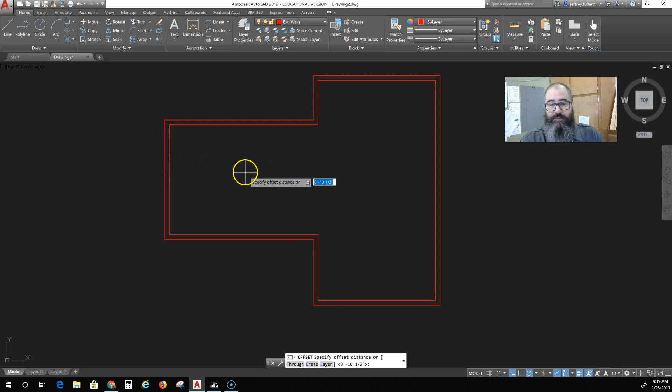So to start with, again, I'm going to use my offset to make use of some geometry that already exists. Now I want my bedroom, my master bedroom. Let's say I forget, sometimes I forget my measurements and I should write them down. But I forget how far it was from here to here, and that's 20 feet.

Okay, so that's going to be enough room because there's also going to be a master bath over here as well. All right, so I want my bedroom to be about 14 feet wide, maybe. I haven't decided yet. Again, we're testing.

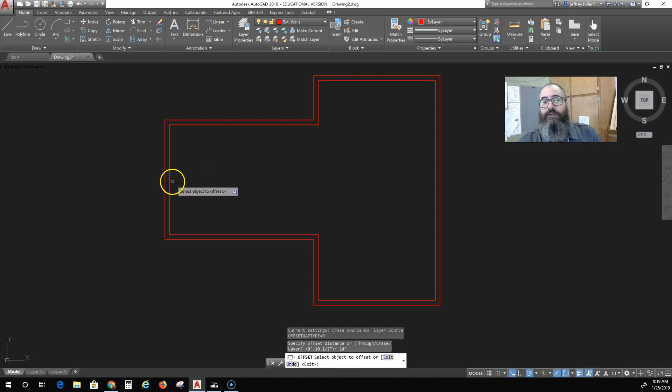So I'm going to offset this interior wall line over here 14 feet. And then I'm going to offset it again. And of course, because I'm just using the same offset command, I'm going to just temporarily change that to the thickness of an interior wall, which the thickness of these interior walls are going to be about, let's see, what was it? 4 7/8 inches, and that's with my core materials and of course the drywall on each side. So I'm going to say 4-7/8 inches, and there we go.

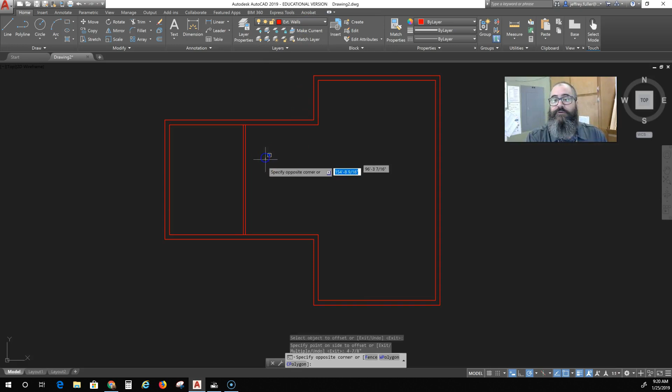Now, because these are interior walls, I really want them to be on the interior layer. So basically I'm going to select them, and I'm going to come up here to my layers panel and click on interior walls. And there you see they're now green.

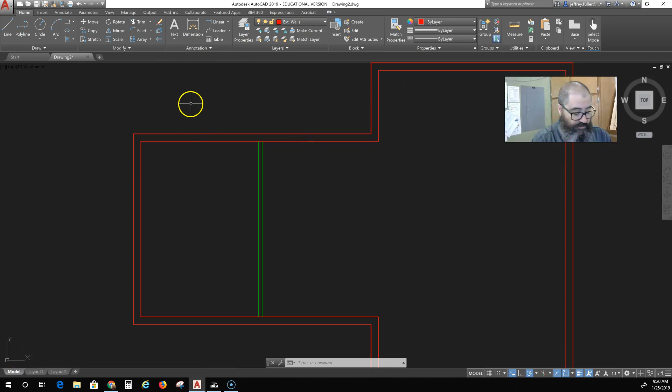Okay, and from here I can choose to do more offsetting, and I think I'll probably do that. So let's do a little trim. I'm going to trim out these little areas right here, and that's going to give me some lines I can work with inside of the bedroom.

And you gotta kind of play with AutoCAD here to kind of get used to what you have to do as far as clicking your buttons. Sometimes you'll see me having some trouble, and that's because I forgot that I have to click enter or something of that nature. I'll try to be a little bit more narrative so that you know what I'm doing.

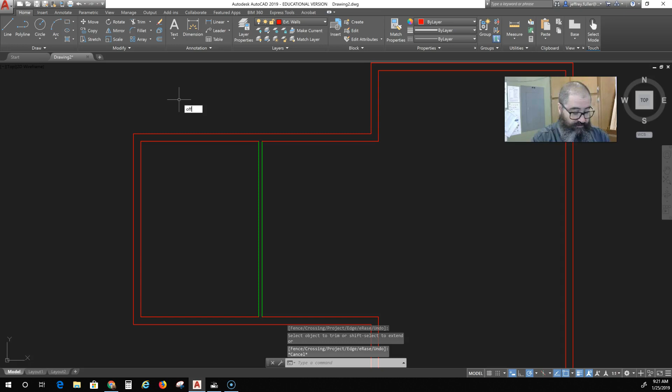But I've got those trimmed, and now I'm going to offset, and I can actually type in offset. And this is for my bathroom. And my bathroom, I'm going to make it about, let's see, 6 feet, and that might change. So 6 feet from this wall to here.

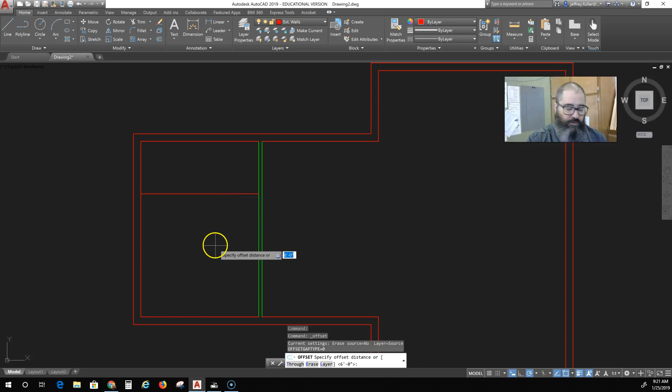All right. And then, of course, I need to do another offset of that one as well. And I'm going to click offset, and it's set at 6 feet. Of course, that's what I just had in there. And I do forget what I'm doing as I'm going along.

Okay, now I'm going to put it on, I'm going to park it on the interior walls layer. Okay, so now we have pretty good area for a bathroom. And again, that might change.

I'm a big fan of walk-in or walk-through closets. I've done these different ways at different times, and I'm going to double check, see how much space I'm still working with.

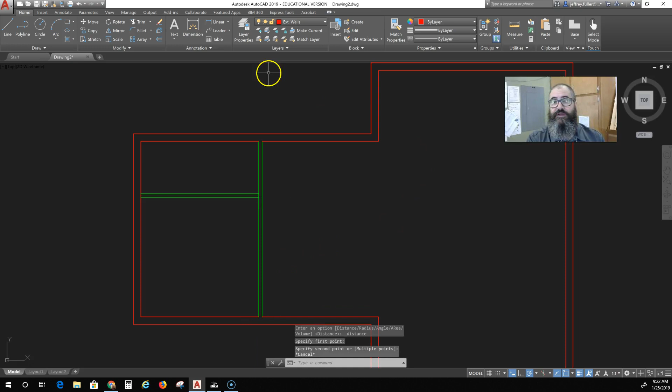13 feet. Okay, so I'm probably going to make a little bit more of some extension here. So what I'm going to do is I'm going to grab this line. I want to move it a couple of feet. I'm not even measuring that, so I really don't know how far that is. All right, and I'm going to delete this one and this one, and I'm going to offset.

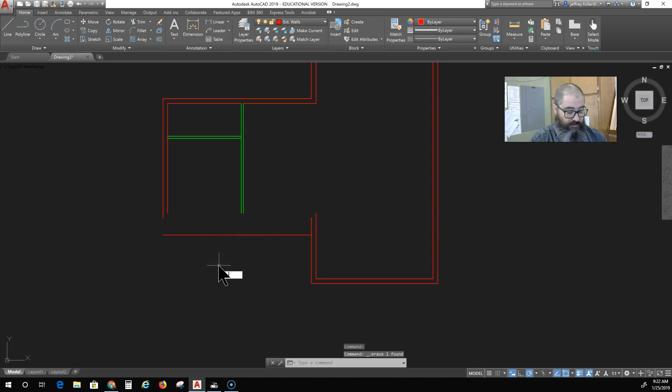Let's see, it was 10.5 inches. It really helps if you write down your dimensions as you're going, because if you're like me, you'll forget what you're doing.

Then we're going to extend. Once I type in extend, I have to choose it and click enter. Instead of selecting my target geometry, I'll click enter again to turn everything into target geometry. It'll go in the direction you want and extend these lines on down.

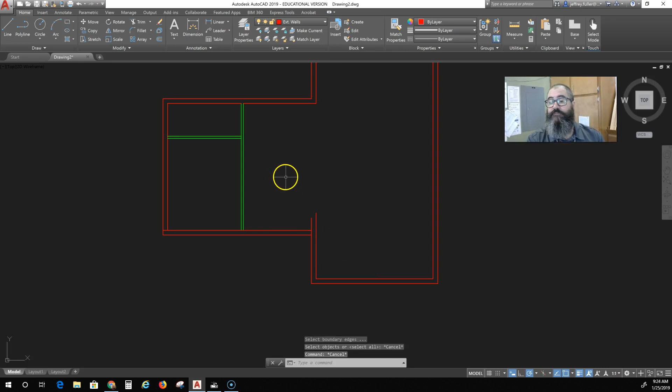Then we can go into trim and do the same thing, clicking enter twice to turn everything into a trim point. Something I did not do correctly there. Trim, enter, enter. Okay, so I'm going to cut that off, cut this off.

Now I can actually use a button, I think it's shift, to switch between modes. I might have to check whether this is trim or extend. Right now I've got it in trim mode, and the shift button changes that. Actually it says it right there in the dynamic input bar: select object to trim, or shift-select to extend. So I can do both while in the same command—I just hit shift to change it. Then I can go back to trim.

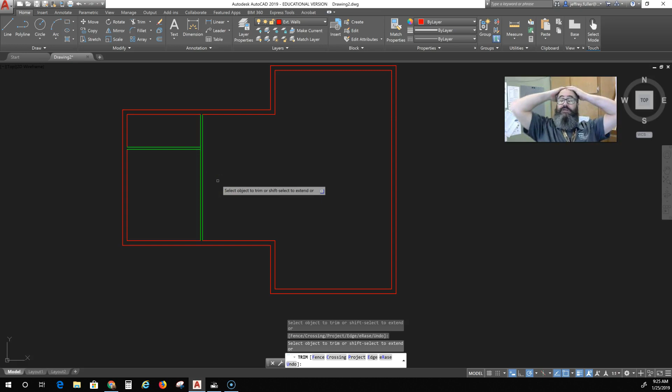I kind of do this as I go, and it helps me think. I may not know exactly what I want to do next, so I do some cleaning up while I think. That's really all I was doing there.

I said I like those walk-through closets—those are my favorite—so I'm going to do this right here. I'm going to extend this. What's a good size, about 5 feet wide? 2 feet on each side to hold the clothes, and that gives you 1 foot to walk through. Maybe I ought to go 6 feet, giving you 2 feet to walk—a little more comfortable while you decide what to wear. So we'll do 6 feet.

So we're going to do offset again, 6 feet. Some of you might be a little more organized than I am—that's perfectly fine, I'm not the most organized person, I tend to think sporadically. Of course I want to offset this one 4 and 7/8 inch.

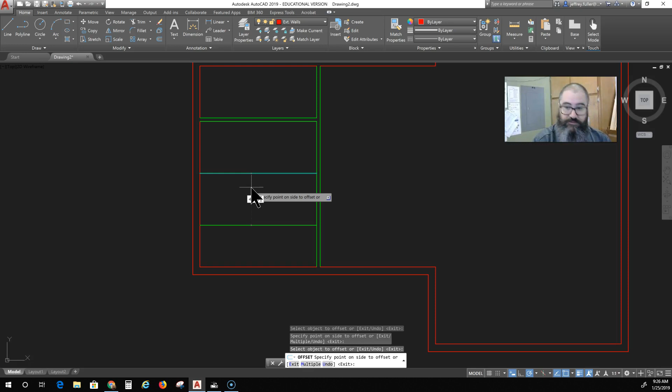Let me see what I'm working with in my master bedroom. From that corner to here I'm at 10 feet—that's pretty good, 14 feet this way, 10 feet that way. However, I do have a lot of space that I can use up.

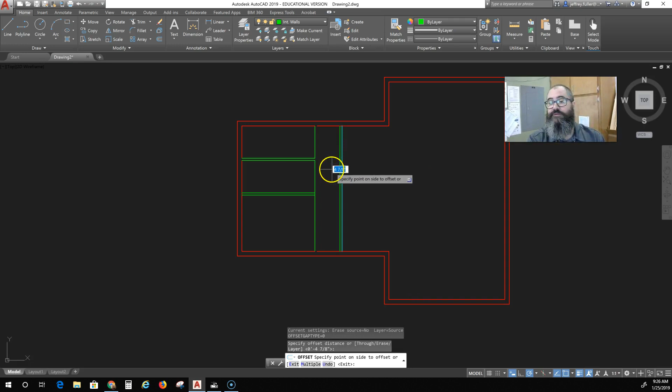So I might move this one a little further here, and I'm going to offset that. If I click the offset, it should still have 4 7/8 in there, and I just click enter to accept that measurement. I'm going to take these lines out—just click on the line and click delete to get rid of those.

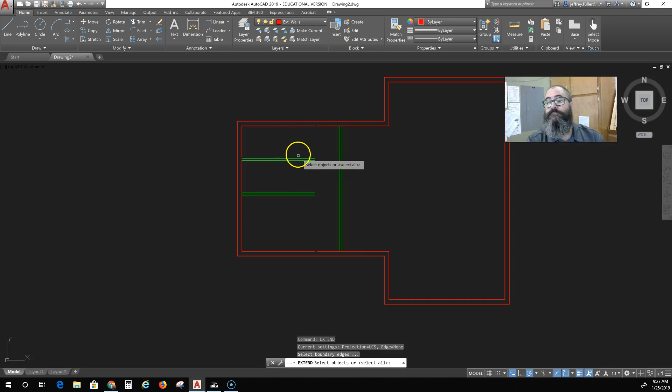Then I'm going to extend, hitting enter again to turn every object into a target object. I'll zoom in and hold shift to make it trim. Okay, so that gives me more room in that master bedroom and the bathroom to work with.

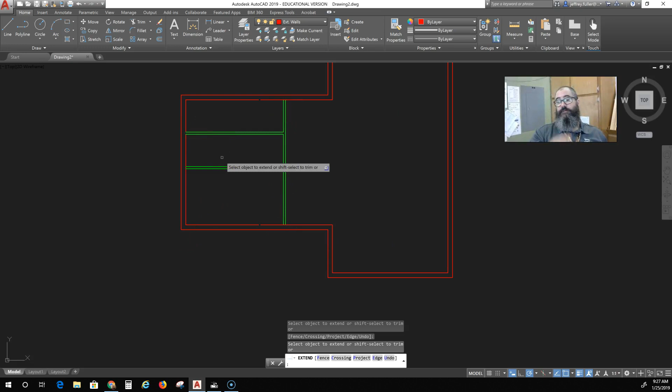Got a spacious closet right here, and I'll have French doors that walk right through here and even into the bathroom. I might make some other decisions on that bathroom—I may end up extending this wall out a little and having a little portico or porch area right in there. Let's connect these lines.

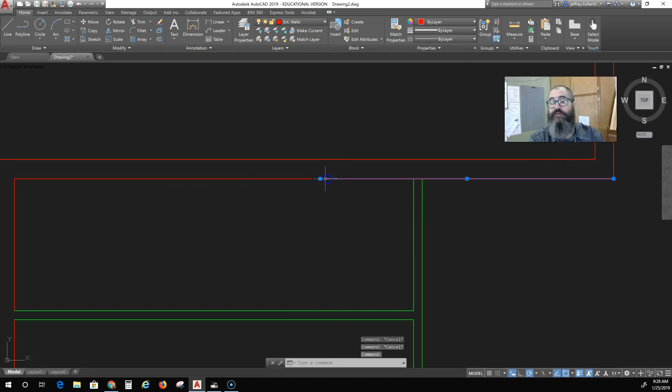All right, so that gets me started, and that's how you do it—that's how you plan, how you divide your spaces up.

Now I'm going to break off and let you see some time-lapse video of me going through the rest of this. So have fun.